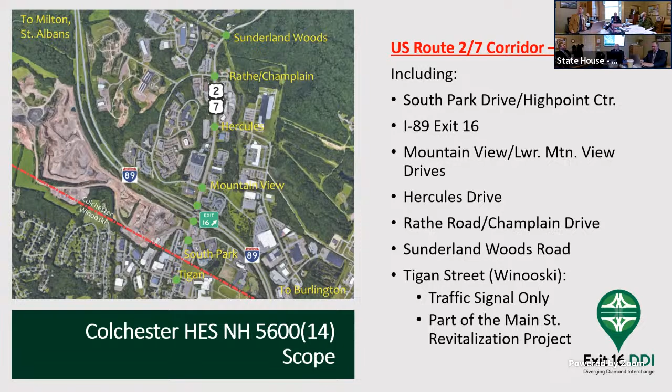And we're going to full depth reconstruct the roadway. We're going to rebuild all the intersections along the way. And we're going to be doing quite a few other improvements as well, starting with stormwater infrastructure. There's no permitted stormwater infrastructure out there today. That's something the agency takes seriously, and we really need to improve that. This was held up because of a gas station who claimed it was a surface well water problem. And also up on Water Tower Hill, there are thousands of employees up on that hill. Yep, exactly. There's a lot of development.

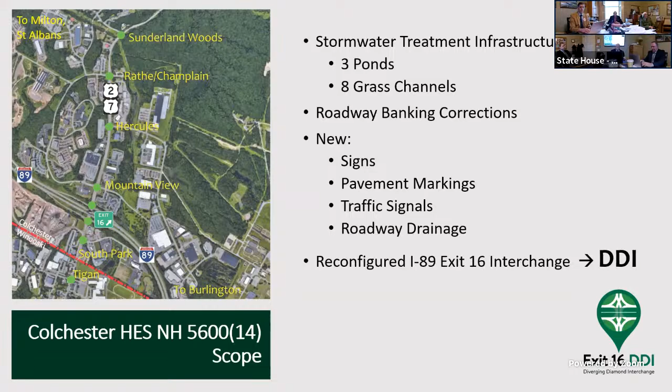2 and 7 are concurrent there for a mile or more. Oh yes, they are concurrent from Burlington to Chimney Corners, so it's like 12 miles or so. We're also going to be doing brand new signs, new pavement markings, new traffic signals, and then the heart of the project is the reconfiguration of Exit 16, and that's going to be what's called a Diverging Diamond Interchange, DDI. This is just a quick shot of what the existing configuration looks like.

So will you just have to shut down Exit 16 for construction? No, you never do that. Oh, and they can get off on the earlier or the later one and come around? No. Unfortunately, Exit 16 is pretty isolated despite it being in a very urban area. You have to go 10, 15 miles. Yeah.

So in this particular photo, we are looking at an aerial of Route 7, which runs left to right, just to give you a little orientation. Winooski would be on the left, Colchester Village and points north to the right. I-89 north is to the top, and I-89 south towards South Burlington and Winooski is to the bottom of the screen.

This is a great picture of what we're trying to deal with at the interchange. One reason we have congestion and safety issues here is you can see, just in the pavement, the heavy left turning movements onto and off of the interstate. Those left turning movements are so voluminous in both the morning and PM peak hours that the whole corridor ends up backing up. So if we can figure out a way to address those left turning movements, we can hopefully make the corridor more tolerable.

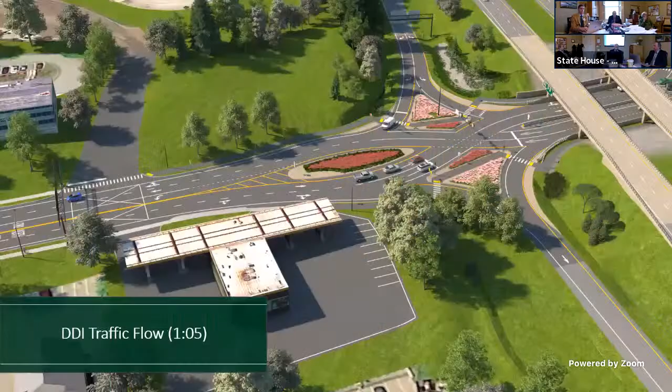So I'll give you just a quick 60-second video as to how traffic will flow. Route 7 in the middle here—traffic is going to cross over at a traffic signal to the left side of the road, and it will travel underneath the interstate bridges, which we're going to maintain. That's another reason why we chose the DDI, because we could build it and still maintain the existing bridges without having to tear them down, since they're in perfectly good condition.

Once you cross underneath the bridges, if you wanted to, because you're already on the left side of the road, you can just slide right onto the on-ramp. Likewise, if you're coming off northbound here, you can yield and take the left without having to wait for a signal, because the formerly conflicting traffic is now on the other side of the road. Then once you get a green light, you just continue on through—it's a straight through movement.

Pavement markings and signs will guide you. There shouldn't be any sort of conflicts. By eliminating that left turn signalization phase, we now give folks essentially more time for the through movement in the signal cycle. That's where we get the efficiency from.

So they're coming down off exit 16 when they want to turn left. Where did they go? Oh right, because they're on the wrong side. So they can just slide on, and if they want to take a right, they'll wait for the signal in a clear spot, and then they'll head out. That's the hard part for people to get used to, because they're not going to the right side of the road for that little bit.

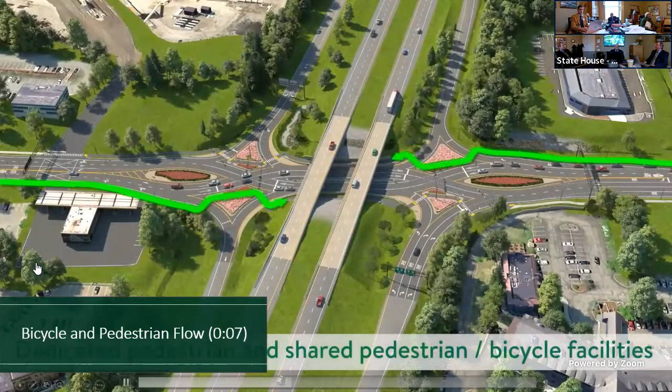Yes, and thank you, Senator, for the segue. Bicycle and pedestrian flow, there are no facilities. This project will build those facilities for those users. There's a high rate of pedestrian usage from folks that live in Winooski that try to go to Mountain View Drive, where there's a pharmacy and a grocery store. Right now, they have to walk in the roadway, it's super unsafe. To your point, Winooski has a high concentration of housing, and this is the closest, best grocery store, so it's a huge pedestrian magnet.

But what I will say is my lovely wife, she works at Mallets Bay, and she always has to go to South Burlington. From Costco to get to South Burlington, we're always stuck at this light, it's just constant congestion to turn left and go southbound. Well, when it was really built many years ago, it wasn't the Costco, the big Mountain View wasn't there.

A question I get frequently is, how is a DDI going to operate in the wintertime? We get snow in Vermont, but at the end of the day, it's going to operate just like any other roadway in Vermont.

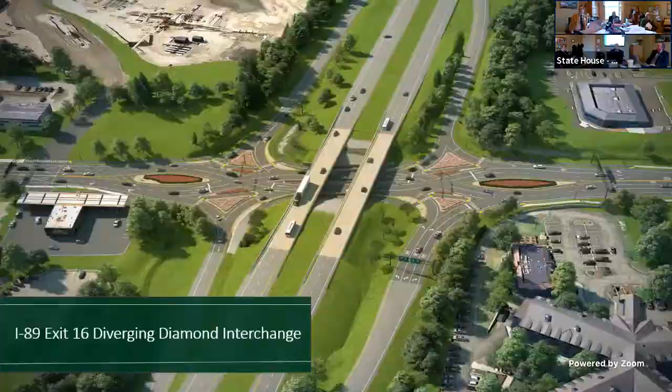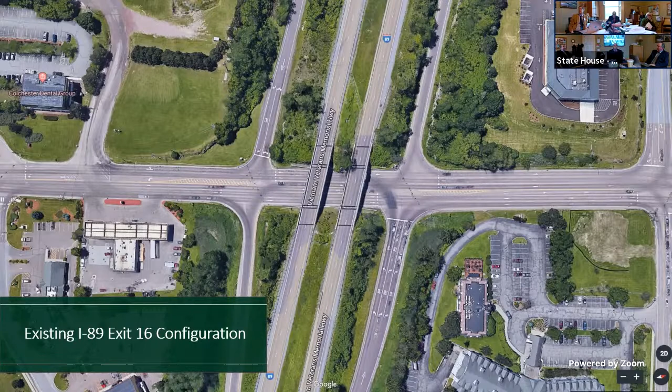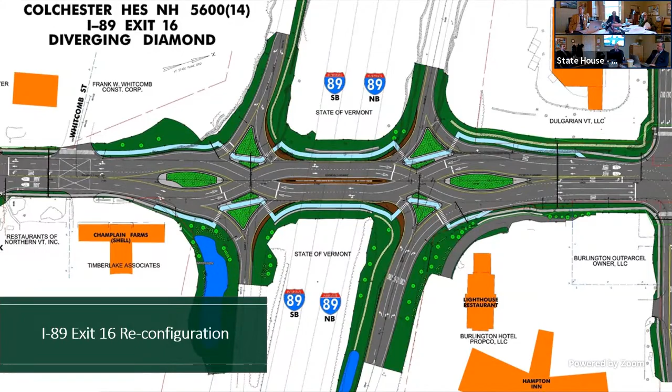This is a bit of a digression, but the DDI actually inhibits wrong way approaches onto the interstate, particularly at this location, because it's what's called a tight diamond interchange. It's very easy for folks to take a left at the off ramp and enter the interchange either by accident or on purpose. The DDI would effectively eliminate those movements because of the geometry and the design of those big islands. So exit 16, which has had a bad history of wrong way entries, this will actually secondarily fix that statistic. So it's a huge thing.

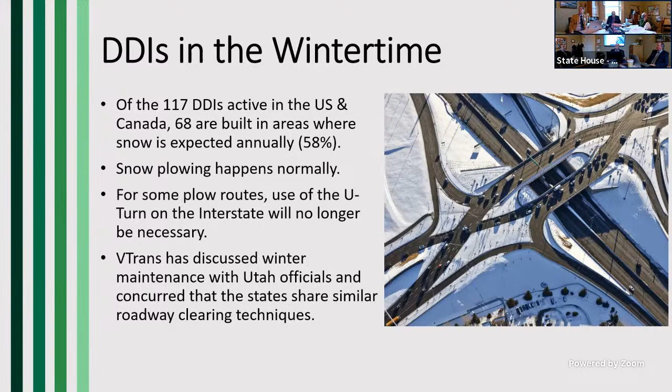So that picture, which one is that? But that's not the intersection we're talking about. No, this is a shot of one of the Utah DDIs, actually. A lot of the Utah DDIs have their arterial roadway over the interstate, which is fairly common, but it can be either or.

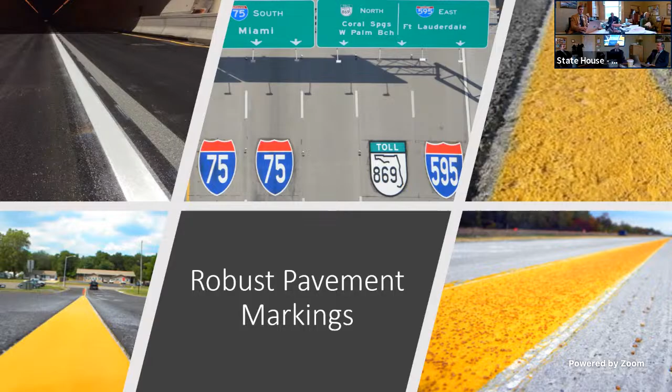In addition to the wintertime conditions, we are planning on a robust pavement marking package as part of this project, more so than we would normally do on other roads, because pavement markings are paramount to steering folks in the right direction, making sure they make it to the left side of the road and back safely. Granted, when there's snow on the ground, pavement markings are obscured, but we feel like this robust pavement marking project will stand up better to both tracking and plowing conditions.

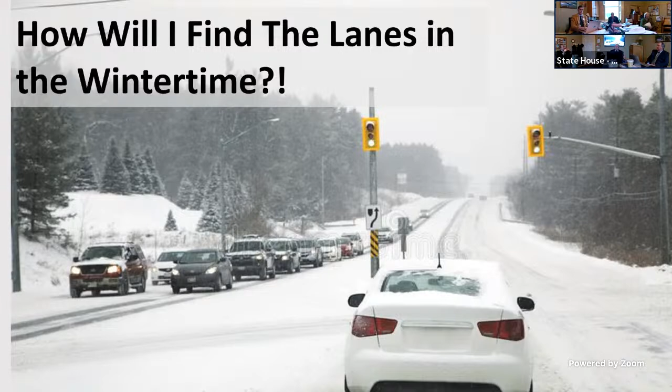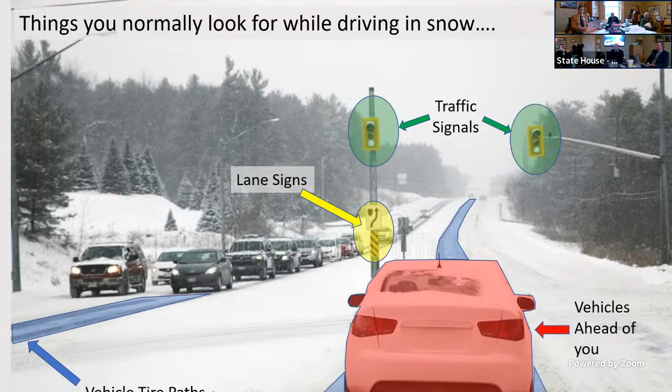So folks ask, how will I find the lanes when the roadway is covered in snow and I can't see the pavement markings? Well, what I tell them is you look for the same things you look for now. You look at signage, you look at the overhead traffic signals, which are aligned over the lane that you're taking. You look at vehicles ahead of you, you look at tire tracks. All those things are still going to be there, present, just on the left side of the road.

So I'm telling folks this will not be a big deal. As long as there's a vehicle in front of you, they know where they're going. If you're the first vehicle through, before the plow comes through, it might be difficult, but that's why we have the signs and the signals.

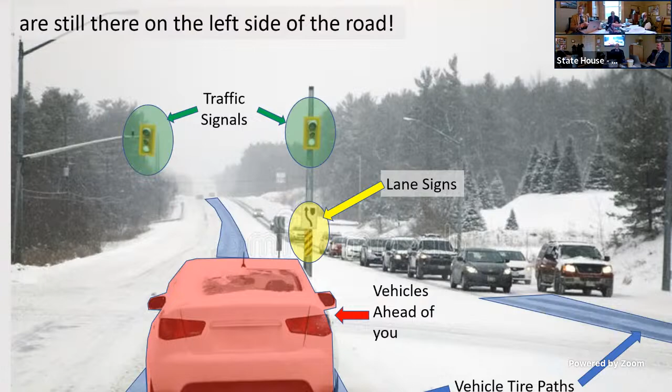So that's the project in a quick nutshell. We've made significant progress. Senator Mazza had mentioned that we scoped this back in 2011, so it's been in design for quite a while. We really wanted to make sure we got this right. We worked with FHWA, highway officials across the country, and other states that had DDIs to make sure we got this just right. We've made it all the way to groundbreaking for what's called C1, or Contract 1. Some folks call it Phase 1, that's fine.

So what we did was break the project into two construction contracts. The first contract, the first phase, will rebuild or build retaining walls underneath the bridges, and we're also doing some utility relocations underneath the roadways. Those items have to occur before all the other items are built anyway, so it made sense to break them out into their own construction contract. That's what folks are working on right now. SD Ireland from Williston won the bid for Contract 1. They are actively working, their first day of work was February 1st.

They have already built the majority of one of the retaining walls, actually. Yeah, they have been moving, but they're going to be starting on the retaining wall on the west side of the road, and it's going to be a little slower because there's a lot of ledge that needs to be blasted out of there to accommodate that new retaining wall.

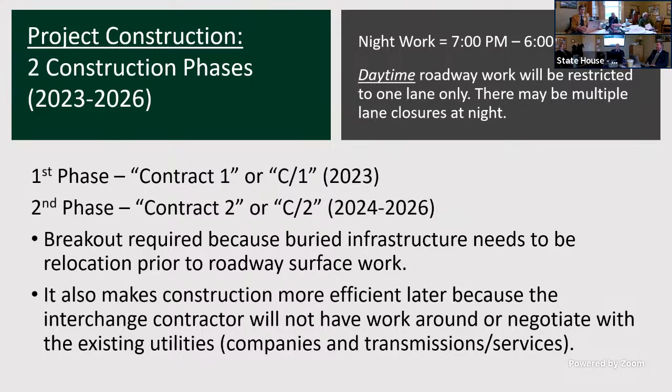The purpose of the retaining walls will be to keep the pedestrians off the roadway in the work zone for the next construction contract. So that'll be a huge improvement for them. The sidewalks leading up to those retaining wall areas will be constructed under C2, but at least to give them a little bit of space.

And then in the second construction contract, that's when you're going to see the things you're going to see as driving through the corridor and the interchange on a daily basis. You're going to see the new ramps, the new signals built, sidewalks, signing. And a lot of this work is going to be done at night. There will be some daytime work. Blasting, for instance, has to occur during the day. Any sort of off-roadway work can occur during the day as well.

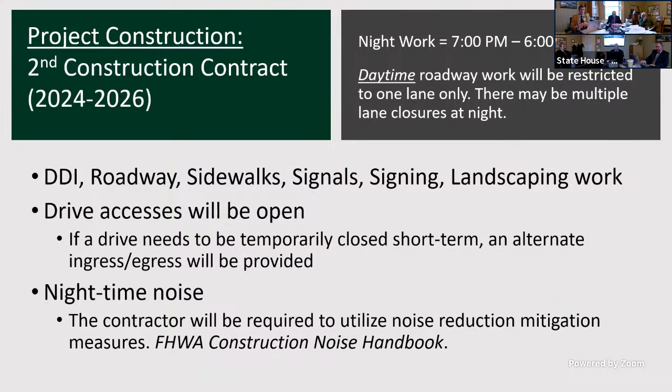But the majority of the work needs to occur during the night time because there are 25,000 cars a day through there. And there are 6 lanes of traffic. And during the peak hours, all 6 lanes are full. So we don't have physical room for the contractor to be out there, so we need to be done at night. So what they're working on today, like I said, is the retaining walls.

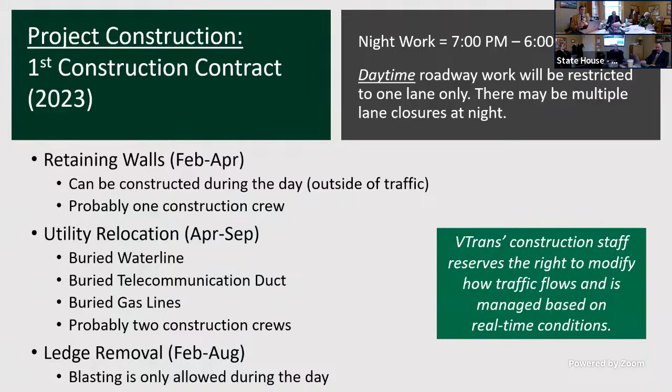They're going to be moving on to utility relocation. That's when the majority of the roadway disruption, travel disruption through this corridor is going to occur in 2023. So it's okay now, traffic-wise. It's going to get busier as the spring approaches and into the summer and fall. And while we're in there, we're actually going to be doing some ledge removal and some drainage as well. So here's the retaining wall that I was speaking about on the east side of the road.

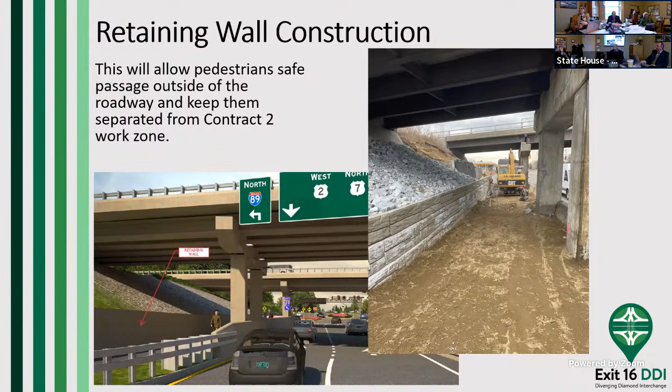This here was all done the last 2 weeks. This is a picture that I took Wednesday. So they have made huge progress already. Fantastic. But they didn't run into ledge on that side, so they were able to go very fast. The pictures on the right side of this screen is where things are going to go slower.

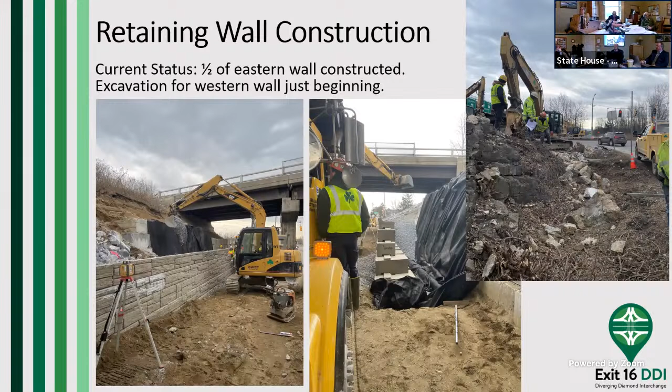You can see there's significant ledge that needs to be removed, and the blasters haven't arrived yet. So they've just been hammering away with mechanical methods, and it's slow. It's very hard rock. It's so hard that when you hit it, it just disintegrates, so they can't get big chunks of ledge out at a time. So it's very slow.

And just to give you a sense as to where these are, the retaining walls are under the bridges, like I said. The yellow line on this plan is a telecom duct bank. There's an existing one that's buried under the road today. We need to replace that as part of our construction. So we're going to build that for the phone companies and the fiber optic companies so that they can come in and move their infrastructure into the new duct bank.

And then the blue line on the west side of the road is a water line relocation. It's a 16-inch water transmission line, comes off Water Tower Hill, aptly named, and feeds pretty much the north part of Burlington and all of Winooski. So it's a major line. That line is in our way for the DDI construction. So Champlain Water District is going to be lowering that line, getting it out of the way, and building new infrastructure for that.

I can just imagine the negotiations that go on with that right there. I mean, some of those companies are going to be the benefactors of new technology or new infrastructure for themselves, but to get them to want to pay for that, that must be a little tough as well. It can be.

In this particular case, 60% of the costs are actually covered by the federal government, because if a utility happens to fall within the limited access or the interstate right of way, it actually will be covered by the federal government. So Champlain Water District did have to do some bonding to get the other 40%, but the line was built in 1973, I think, and it was already showing signs of degradation. So they were going to have to replace it whether this project came through or not. So the timing of this project helped them out because they were able to pay the majority of their costs.

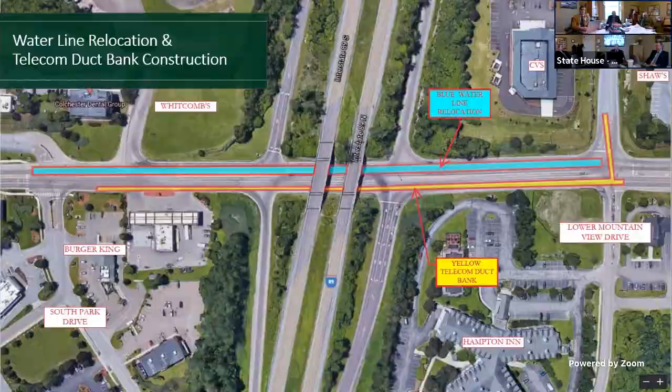SD Ireland out of Williston, like I said, won the bid for this first contract. And their subcontractor is Maine Drilling and Blasting. They're going to be in charge of ledge removal.

The last piece that I'll talk about for this project is public outreach. DDI is an innovative engineered traffic solution for congestion in the United States, and the northeastern United States is not very familiar with the DDI. We felt like we needed to do a more robust public outreach program for this project to increase its visibility, to help educate. So we hired a public information consultant to help us in working with the stakeholders, the users, the residences, and the businesses nearby, in addition to the municipalities, Colchester and Winooski.

And their scope was two-pronged. They are tasked with providing the public with information regarding the project, but also helping us do the education piece as well. So we have a series of tools on our website that folks can go and check out. We have some animations, much like the ones I just showed you a few minutes ago, but much longer. We also have some videos and some write-ups, along with a driving simulator, which will be going back out on tour this summer. We're excited about that. It was out on tour going around the county for quite a while, but then COVID happened.